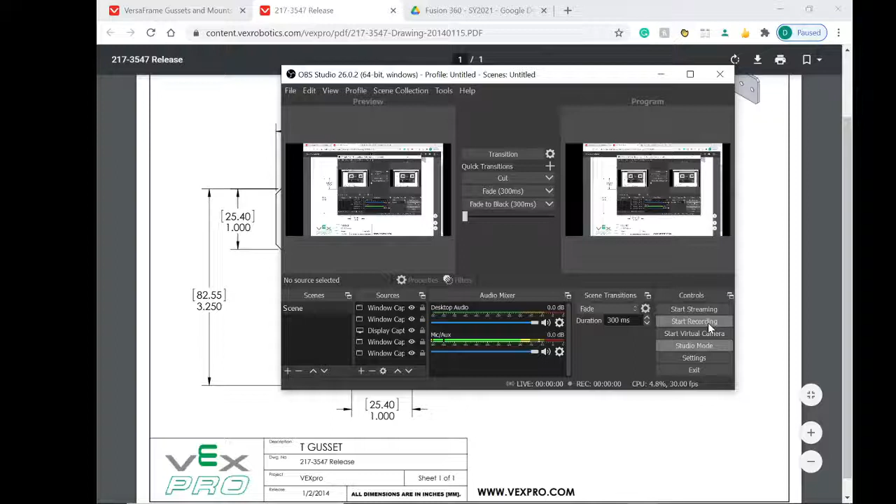The T Gusset is used when holding VersaFrames from the exterior edge to the interior of the chassis. So this is the T Gusset. Yeah, there's not really much to it. It's the same as the L Gusset, just with a side right here. So enough chit-chatting, let's go.

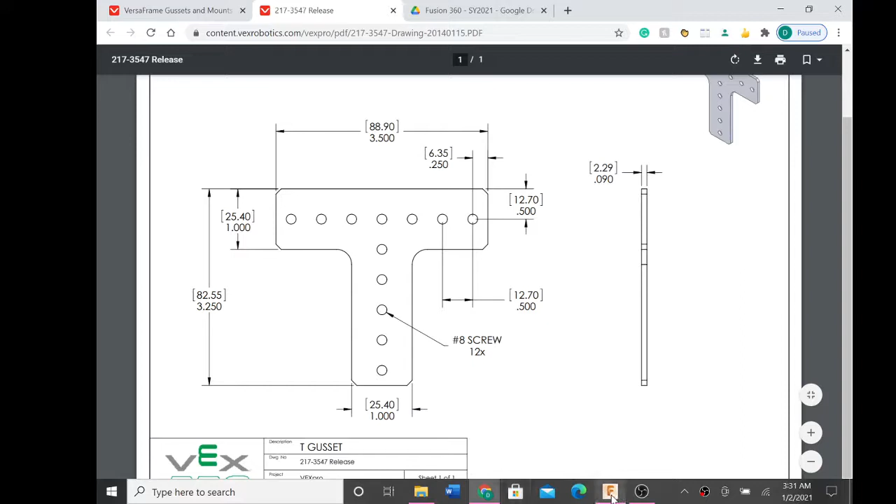I want to start a new sketch, and want this to be the same XY plane, and want to use the line tool.

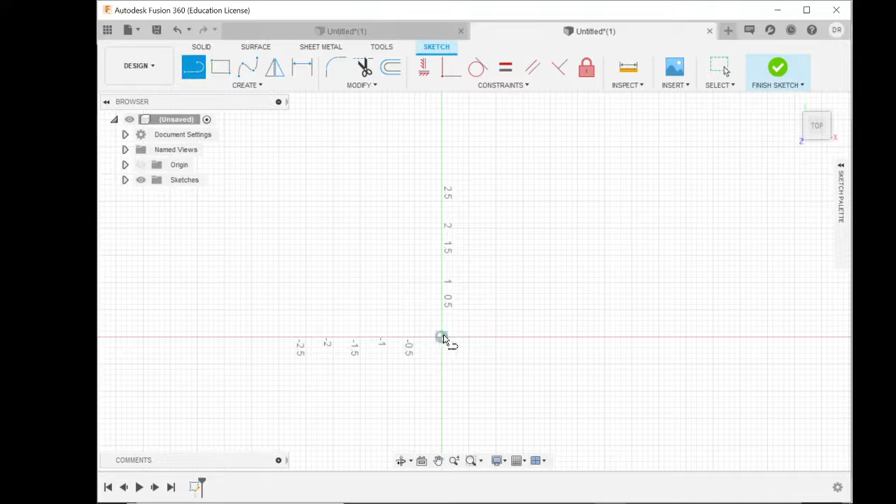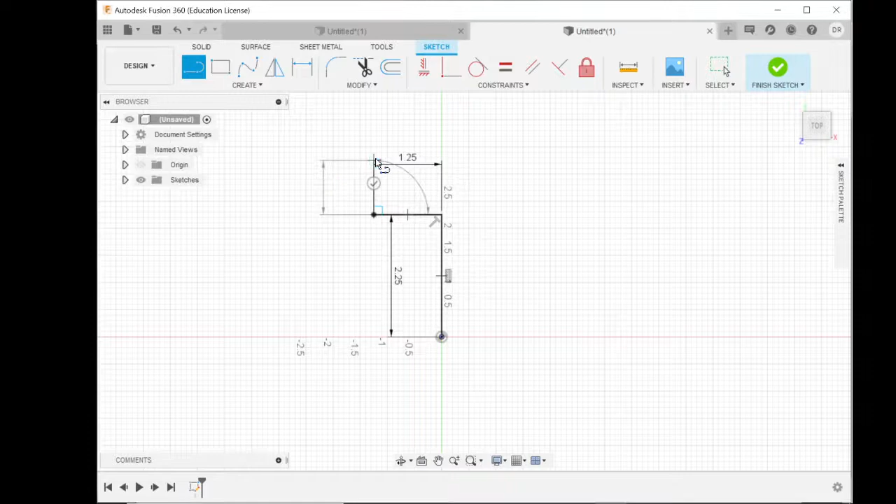Here we want to start off with a vertical length of 2.25 inches. Okay, you want to click that and want a horizontal length of 1.25 inches. You want a length up that goes 1 inch. You want a horizontal length that goes 3.5 inches. And another one that goes 1 inch. Another horizontal length that goes 1.25 inches. And then all the way down to 2.25 inches. And then we want to finish off with 1 inch.

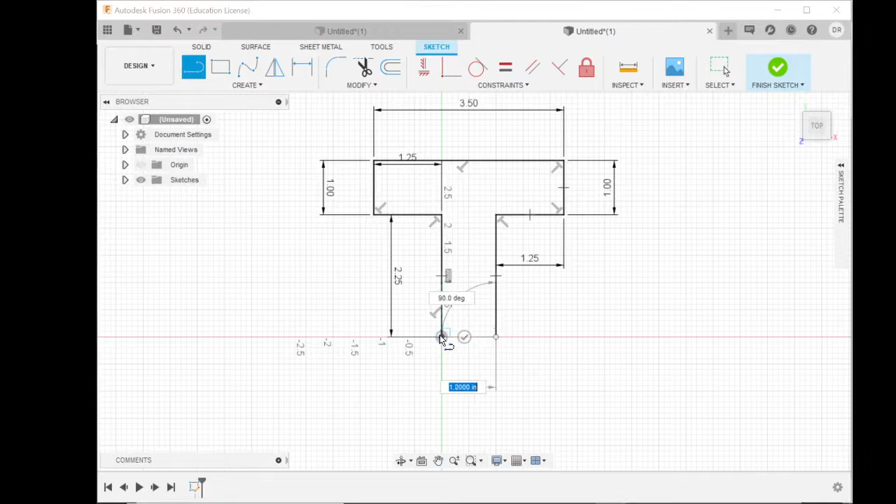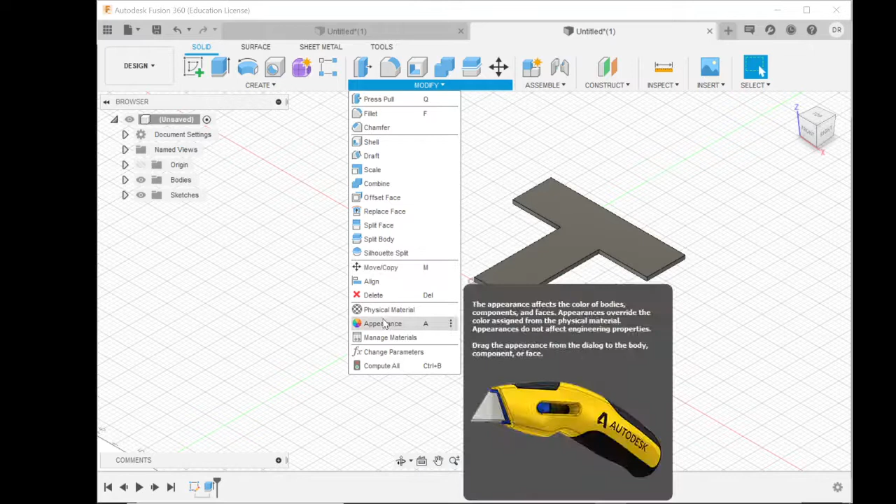So once we've done that, I want to extrude the T Gusset. I want this T Gusset to have an extrusion of 0.09 inches. And boom. And like always, we're going to modify the physical material because it's always better to work with a lighter surface. We want to pick the material aluminum 5052 under the metal file. Ah, much better.

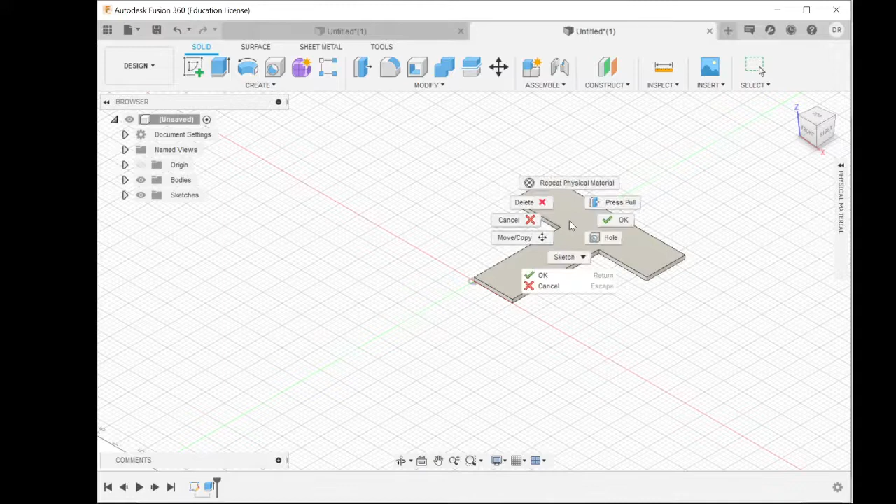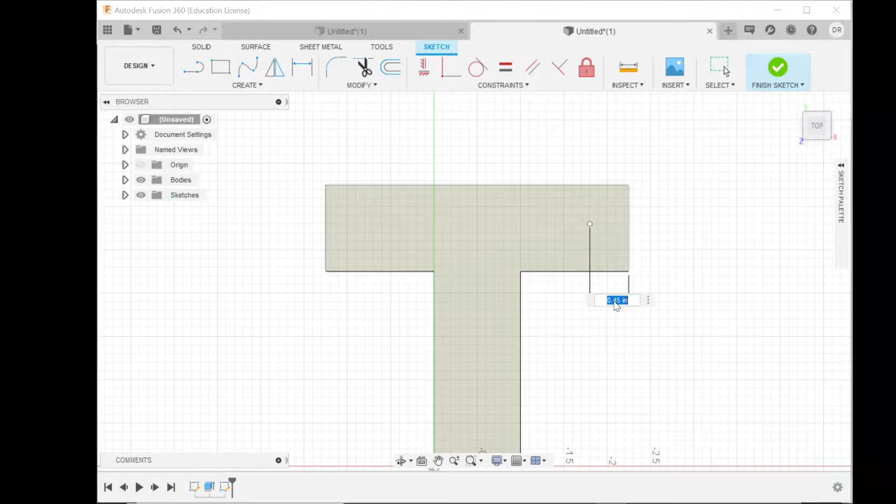So then we want to create a new sketch on the top. Then we want to create a point, and click wherever. Again, then we're going to dimension this. Want this point from this side to be 0.25. Then we want this point to be 0.5.

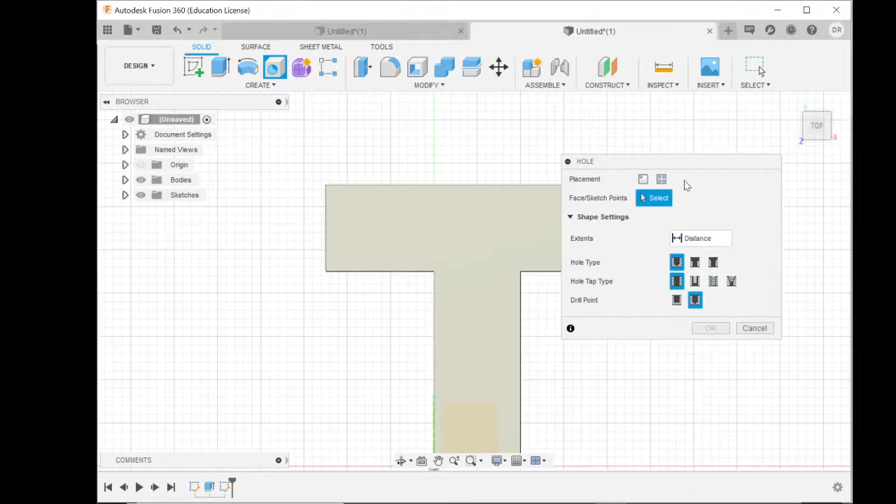Now that we're done with that, we could finish sketch. And we're going to go to hole. We want the diameter to be 0.164, and we want our depth to be 0.09 to penetrate all through.

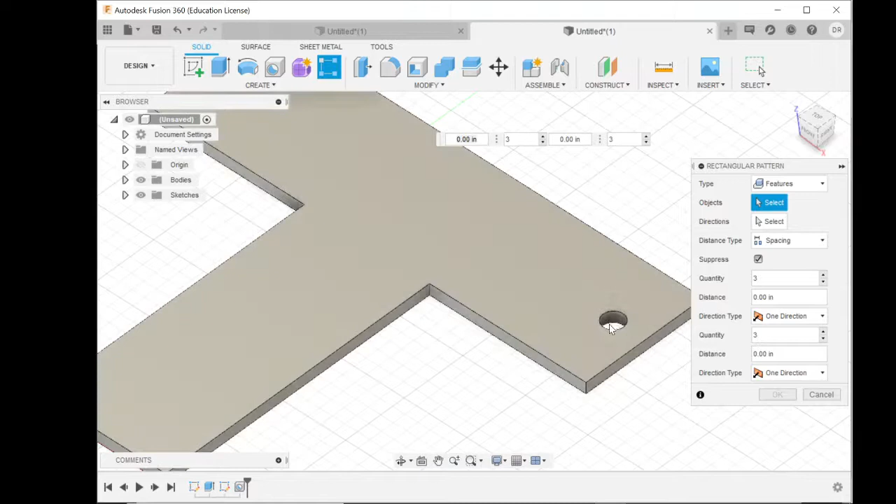And we want to go to our rectangular pattern, and then we want to move our view cube so we could see the interior. We want to pick that. Distance type to spacing. We want the direction to be this top line. So we're going to want 7 holes that are spaced 0.5 inches apart. And once we're done with that, we click enter, and now we have our top holes like that.

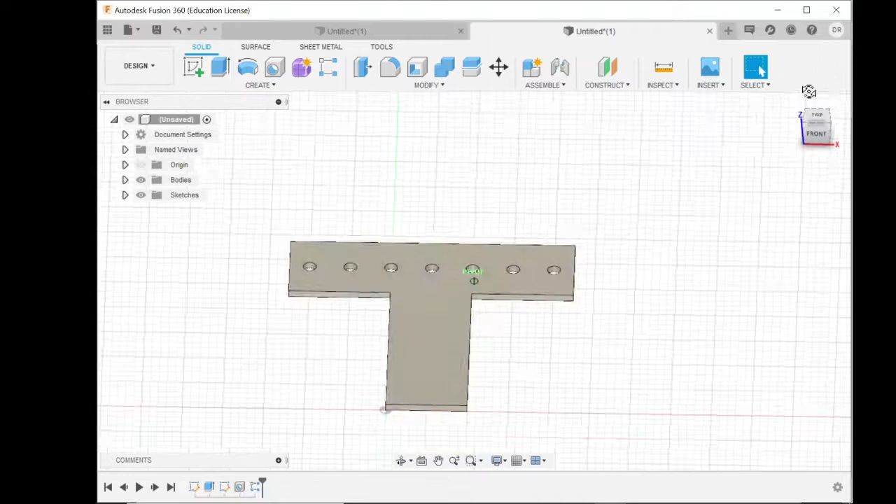So now we want our bottom holes. So I'm going to create another sketch on this top plane right here. And we're going to click S to find our point. Click wherever, it doesn't matter. We're going to dimension. We want this side to be 0.5. And we want this side to be 0.25.

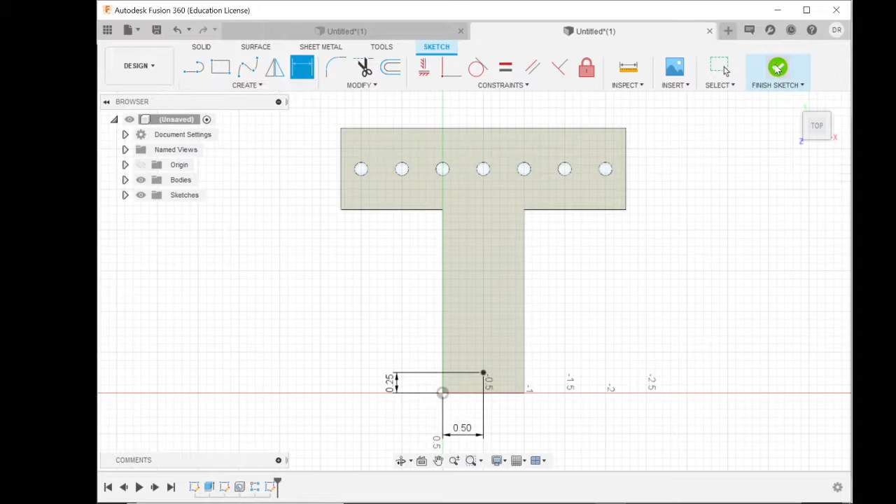Now we want to finish sketch. We want our hole, it should be the same. If it's not, just change it to 0.164 inches in diameter and a depth of 0.09 inches.

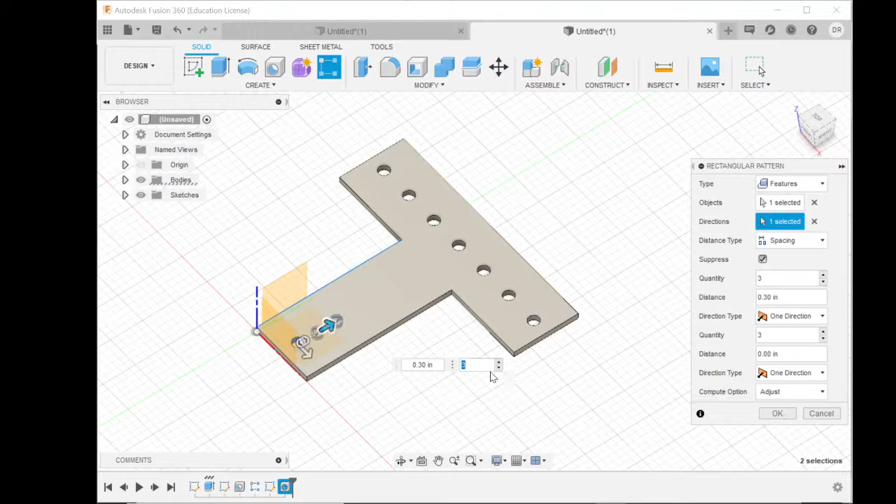Once we're done with that, we want to go to our rectangular pattern. Select the direction, we want this direction. And we want 5 holes that span 0.5 inches.

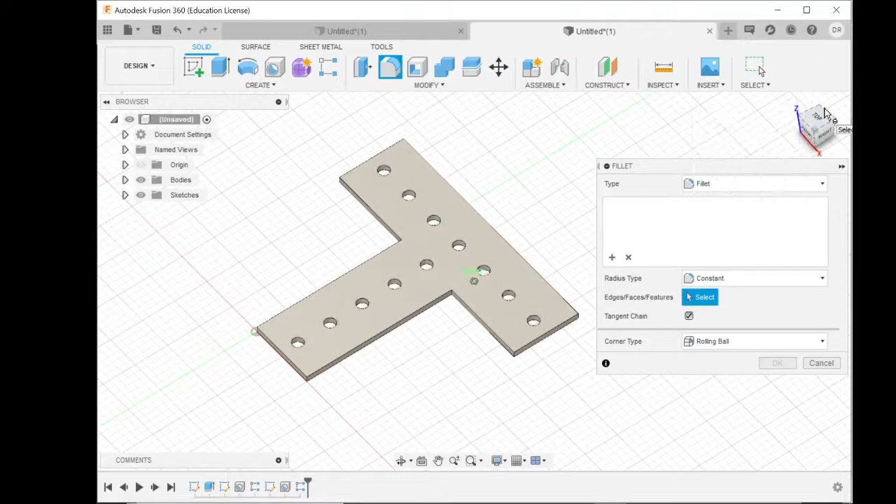Boom. Now that we're done with that, we want our fillet to be 0.25 inches. So want to zoom in here, you want to shift click here, and then you want to shift click here, 0.25 inches.

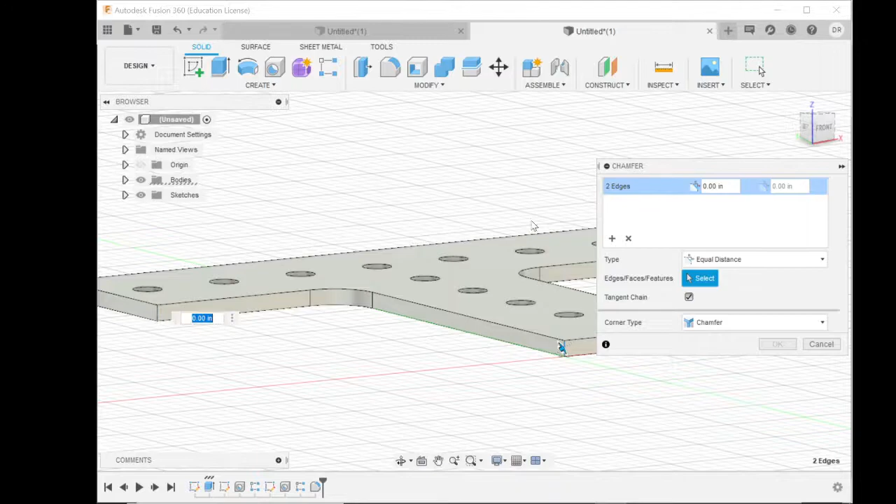Boom. And now we're going to do our chamfer. So I want to click this edge, shift click this edge, just rotate, shift click here, shift click here, and then rotate here, shift click, and shift click. And we want this chamfer to measure 0.12.